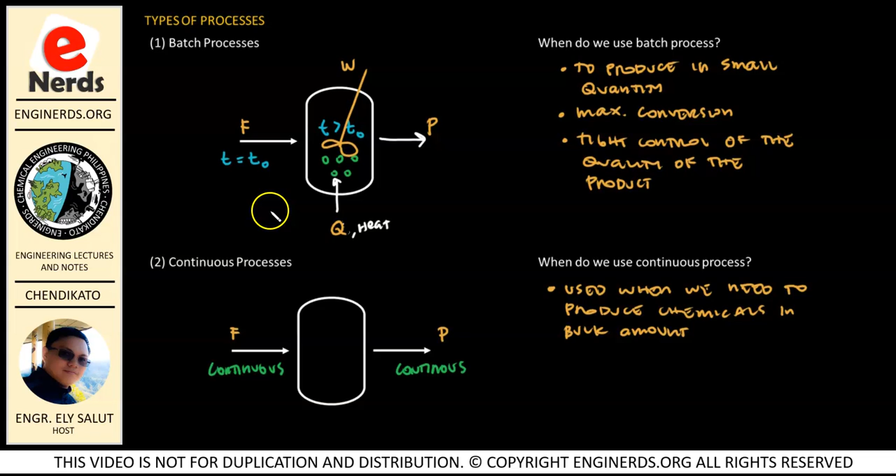So we will be discussing these fundamental laws like the law of conservation of mass, the first law of thermodynamics, and Newton's second law. And then, we will start discussing itong types of processes natin. Meron tayong tinatawag na batch process, continuous processes, and the semi-batch processes.

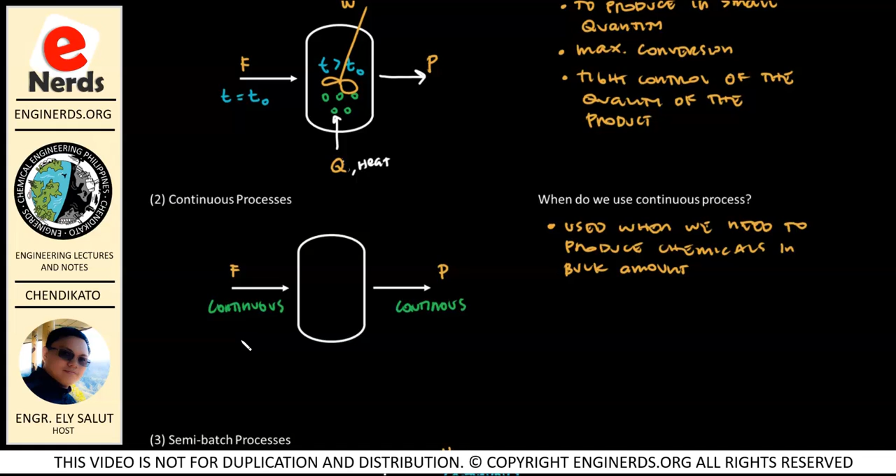Moreover, we're also going to discuss yung tinatawag nating steady state and unsteady state processes. So, mahalaga na maintindihan natin yung pagkakaiba ng mga to bago tayo mag-aral or bago natin sagutan yung mga problems na ma-encounter natin in chemical engineering calculations and unit operations.

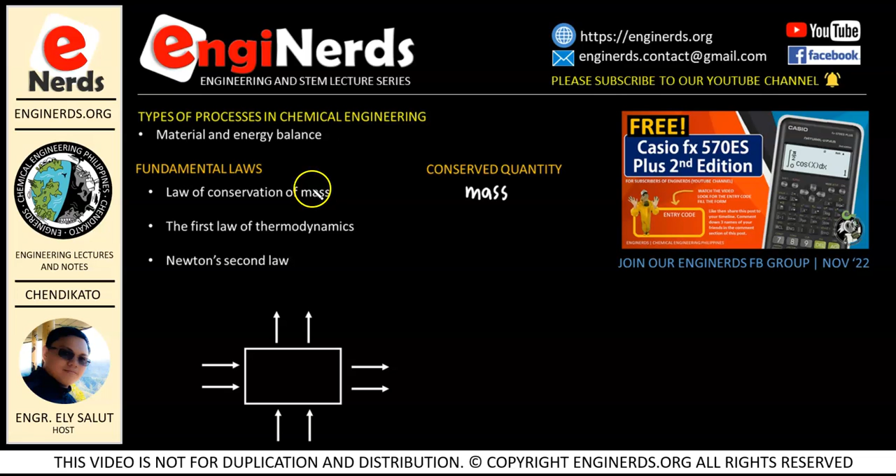Now, another fundamental law na ma-encounter natin is the first law of thermodynamics. The first law of thermodynamics states that the total energy of the universe is constant. So energy cannot be created nor destroyed, but can be transformed from one form to another. We have a separate video about the first law of thermodynamics, kaya if you're really interested about this topic, you can just search our YouTube channel.

So as stated sa first law of thermodynamics, our conserved quantity here is energy. Right, because our energy cannot be created nor destroyed, and it can just be transferred from one form to another.

And another fundamental law na ma-encounter natin when we are studying engineering is yung tinatawag nating Newton's second law. Newton's second law states that the summation of all forces is equal to the rate of change of the momentum. So, therefore, our conserved quantity here is momentum. And you will see the application of this law when you study engineering mechanics.

Well, for our topic today, we will not be concerned a lot about Newton's second law, but we will be concentrating dito sa law of conservation of mass and the first law of thermodynamics, in which our conserved quantities are mass and energy. Because this is usually what we are using when we are dealing with material and energy balance. So, dahil conserved ang ating mass and energy, based dito sa law of conservation of mass and the first law of thermodynamics.

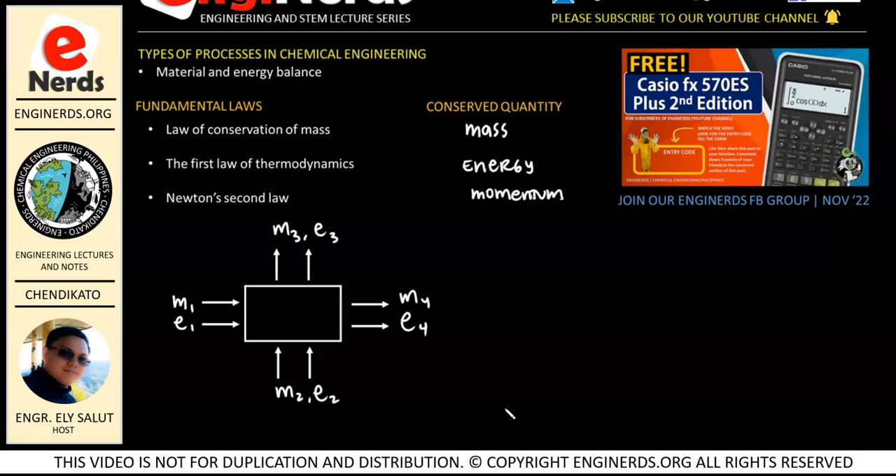Okay, because mass and energy cannot be created or destroyed, but energy can just be transferred from one form to another. Alright, so malinaw na yan, ano? Meron tayong tatlong law na nagiging batayan in studying chemical processes.

So, ano-ano ba yung mga types of processes na ma-encounter natin when we are studying chemical engineering? So, meron tayong tatlong types ng processes. We have the batch process, continuous processes, and the semi-batch processes. So, ano yung mga pinagkaiba niya? Yan yung pag-uusapan natin ngayon.

First, meron tayong tinatawag na batch processes. So, let's consider this as our process. Let's say we have a reactor, and then this is our feed, F. So, ibig sabihin, we are charging our material dito sa ating process. Here in the batch process, we are charging our material at time is equal to 0. So let's say our time here is equal to time 0 or our initial time, right?

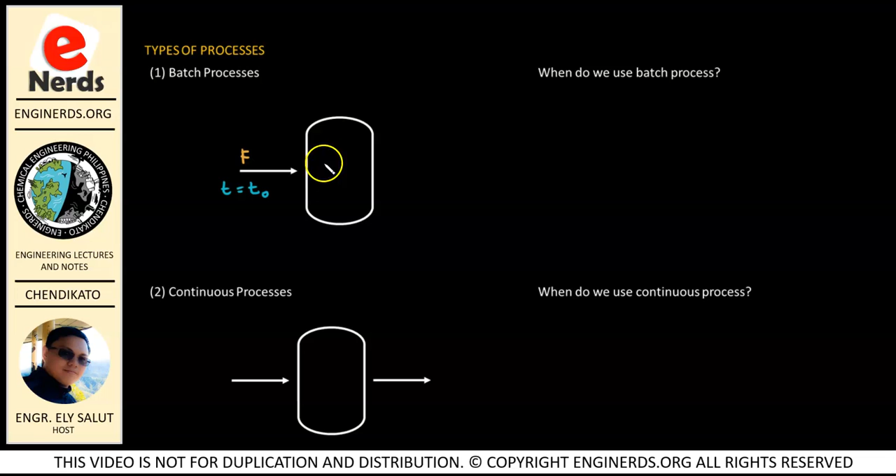One thing that you need to take note kapag meron tayong batch process is that there is no mass that is crossing our boundary. So, ibig sabihin, at time is equal to 0, nag-charge tayo ng feed dito sa ating process. At time greater than time 0, wala nang pumapasok na feed dito sa ating system, because once the process starts, there is no mass that crosses our boundary. Ito yung boundary ng ating process. So wala nang nagko-cross na mass dito sa ating system once time starts for the process.

However, mass lang naman yung hindi pwedeng mag-cross sa boundary. That means, energy can cross our boundary. Ibig sabihin, pwede tayong mag-apply ng heat, Q. So, this is heat. Pwede tayong mag-apply ng energy in a form of heat. Or, if this is mixing, we could also stir our process, so we are also applying energy in a form of work. So, let me change this to orange para mas visible yung ating mga details dito sa ating diagram.

Alright, and now, on the batch process, just after we apply yung kailangan nating heat or work and reach yung kinakailangan nating condition ng ating material, then that's the only time that our product will come out of our process. So this is our product P. Because the product will not come out until our process is finished. So let's say, hinihintay natin mag-take place yung ating reaction or may condition tayo na gustong ma-reach bago natin makuha yung product.

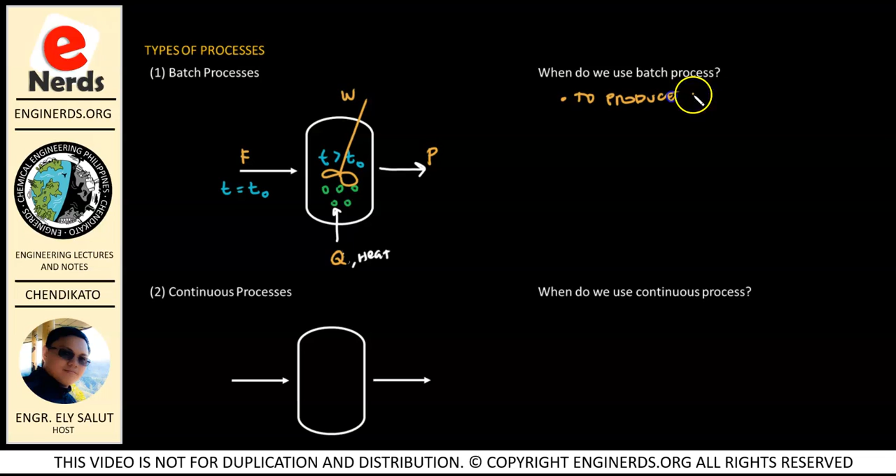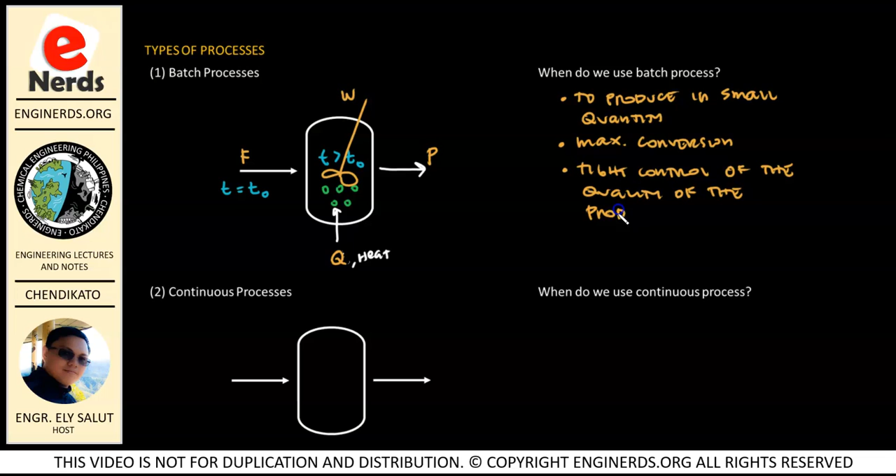So when do we use batch process? Well, we usually use batch process when we want to produce in small quantity. We also use batch process if we want maximum conversion. And also, we use the batch process in order to have a tight control on the quality of the product. Okay, so yan yung tinatawag nating batch processes.

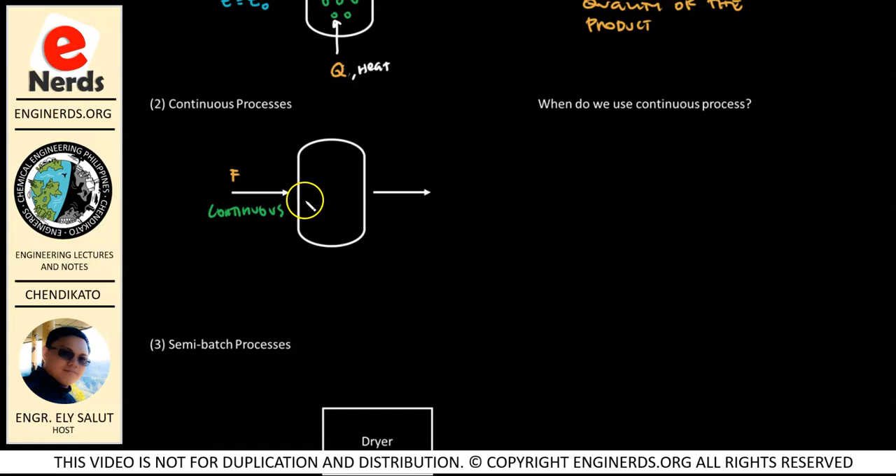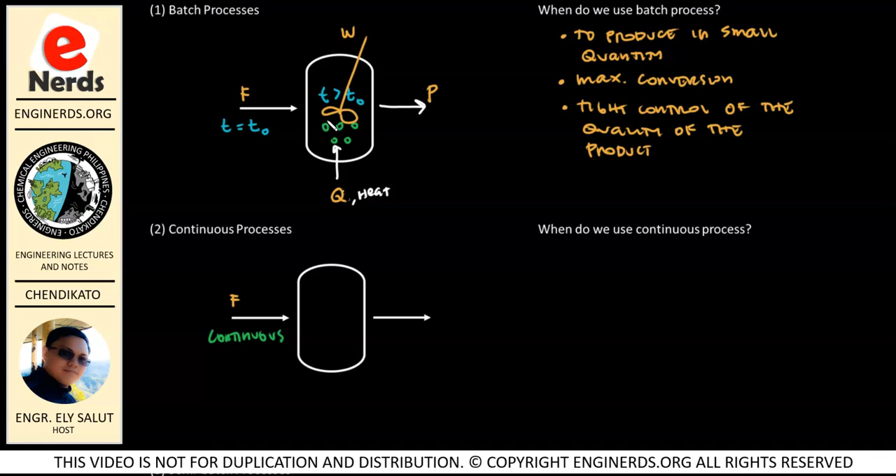So ano naman tong tinatawag nating continuous processes? Ano yung kaibahan niya sa ating batch process? Dito naman sa continuous process, our feed is charged to our system continuously. Kung naalala ninyo sa batch process natin, we will charge our feed dito sa ating system at time is equal to 0. Then after that, hindi na tayo magcha-charge uli. So once the process starts, wala na ring feed na pumapasok sa ating system.

While dito sa continuous process, yung feed natin is continuously fed dito sa ating process. And at the same time, our product P is also continuously taken out. So continuous yung flow ng ating feed and continuous yung flow ng ating product. Okay, so yan yung pagkakaiba niya sa batch process.

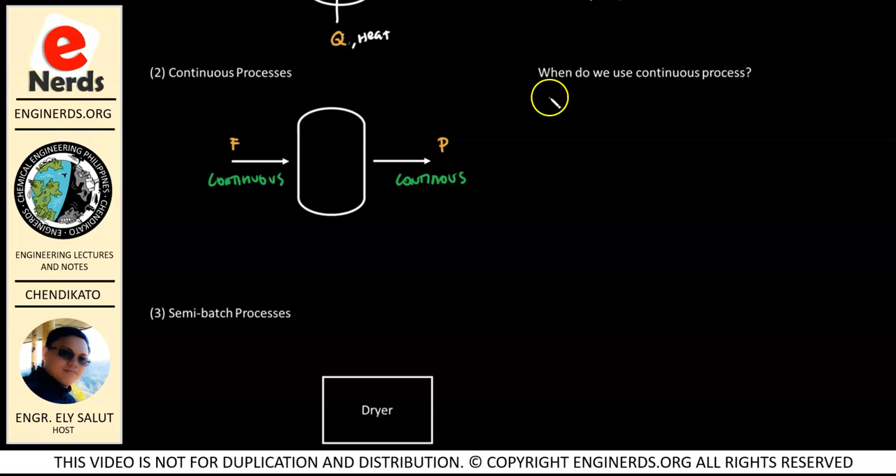We use a continuous process when we need to produce chemicals in bulk amount. Okay, because in continuous process, we will have high throughput. So ang example niyan is yung petroleum refinery, in which we need to produce petrol, diesel, kerosene, and other petrochemical products in a very large amount, and a daily high throughput is required.

Kaya makakakita tayo ng mga large distillation tower in petrochemical industry where yung feed natin is continuously fractionated and the product is taken out continuously. Okay, so yan yung pagkakaiba natin sa ating batch process. In our continuous process, continuous yung feed natin and continuous din yung ating product.

Well, ano naman itong tinatawag nating semi-batch process? Well, semi-batch process is neither batch nor continuous, but rather it is the mixture ng ating batch process and continuous process. And mas madali itong ma-explain if we are going to give an example. So, first, let us have a dryer as our example wherein, let's say, we have a feed or a wet feed in which we need to reduce the water content.

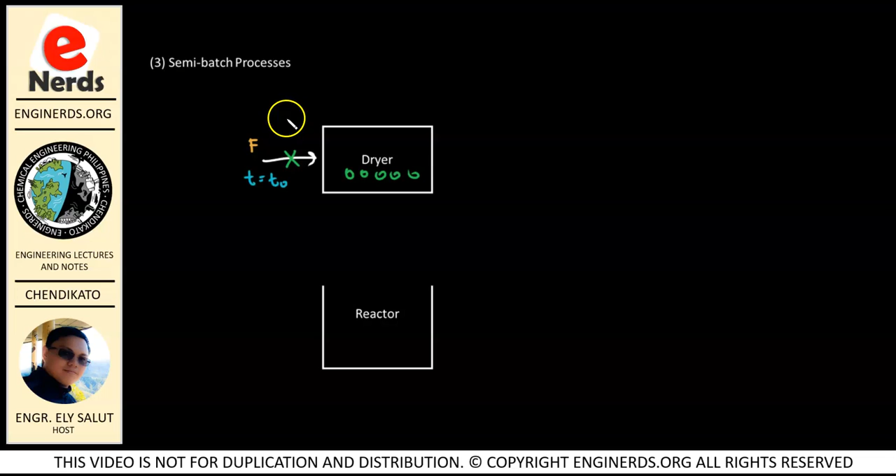So let's say here, this is our feed. Let's have this as F. So katulad nung ating batch process, at time is equal to 0, we're going to feed our raw material dito sa ating dryer. So after that, we will stop supplying itong ating feed, katulad nung batch process. At time greater than 0, wala nang papasok na feed dito sa ating dryer. So kapareho lang siya nung batch process, right?

But then, we will be supplying energy dito sa ating system. Since this is a dryer, we will be supplying energy in a form of heat, heat Q. Now, while we are drying, nag-evaporate yung ating mga water content. So the water is continuously going out of our system. So this is continuous. And then later on, our dry product will be coming out. This is the dried product.

But as you can see, unlike our batch process, wherein the mass cannot cross the boundary, dito sa ating semi-batch process, habang tumatakbo yung ating process, merong mass na natatanggal sa ating system. So, mass can also cross the boundary. Continuously, lumalabas yung ating water. That is why you cannot categorize that as batch and you also cannot categorize that as continuous, because hindi rin naman continuous yung ating feed and product, but continuously merong lumalabas na component dito sa ating process.

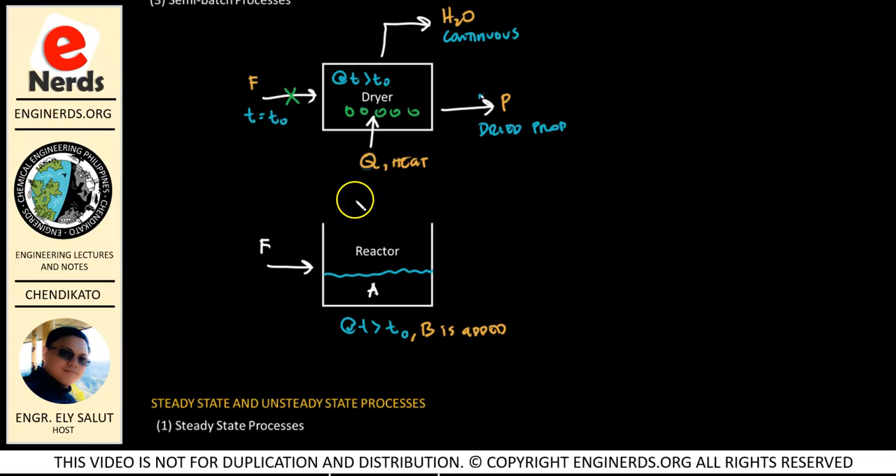So, let's say naman meron tayong reactor. There are also reactors that are used in a semi-batch process. Let's say our feed is charged to our reactor, initially supplied na siya dito. This is our material A. But during this process, at time greater than T0, lumagpas na sa ating initial time, we will be adding component B.

So, we cannot say that this is a batch process because during the process, at time greater than T0, meron pa ring material na nagko-cross ng ating boundary. And because you added another component, you will be mixing that to reach yung kinakailangan nating concentration or condition ng ating product. During that process, our product is not yet taken out of our system, hihintayin natin na ma-reach yung condition na kailangan natin bago natin siya ilabas.

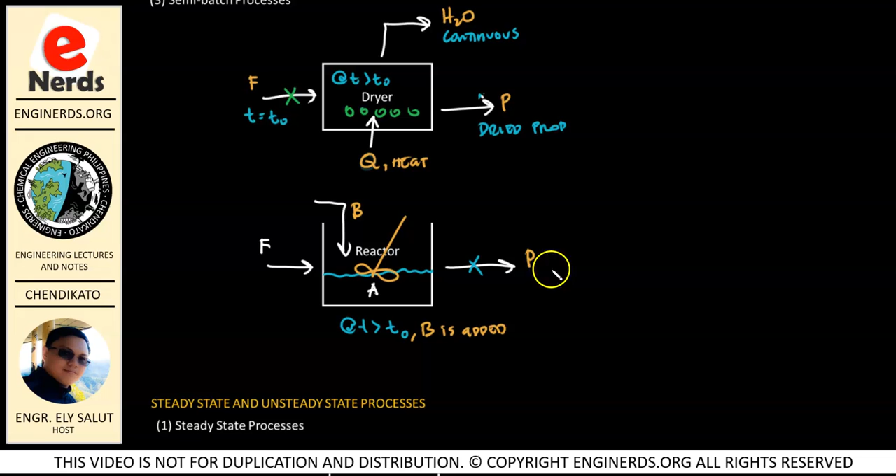So, as you can see, it is not a batch process because here, mass is crossing our boundary at time greater than T0, our initial time. And at the same time, our product is not continuously leaving. So it is not batch, it is not continuous, so this is a semi-batch process.

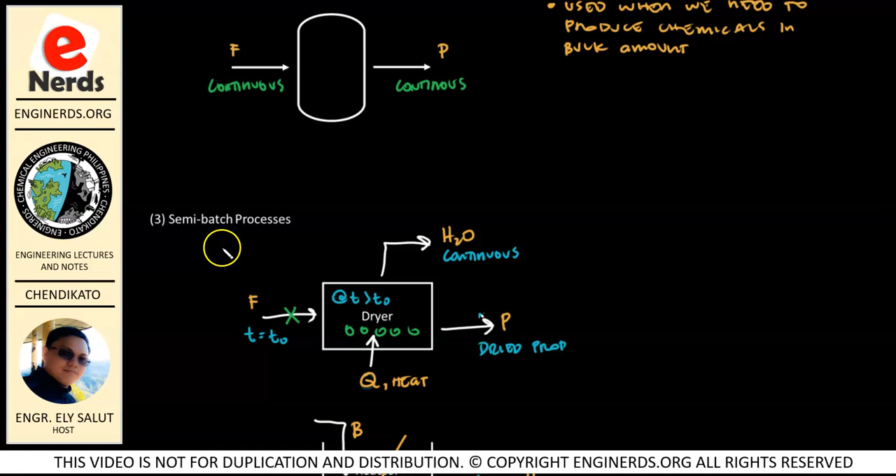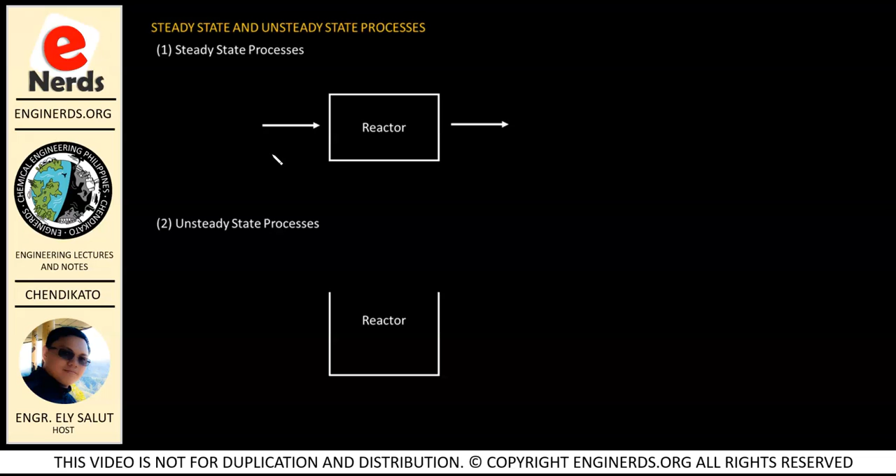I hope it's clear now what the difference is between batch process, continuous process, and semi-batch process. Now, another type of process we encounter is what we call steady state and unsteady state processes. Let's briefly discuss the difference between steady state and unsteady state process.

In a steady state process, our process variables do not change by time. Well, it can fluctuate a little around a constant value, but generally, the variable does not change by time.

Let's say here we have our continuous process, because most of the continuous processes we encounter are operating in a steady state. This is happening mostly in the continuous process we studied earlier. Continuous process means our feed continuously enters our system, and continuously our product leaves our system.

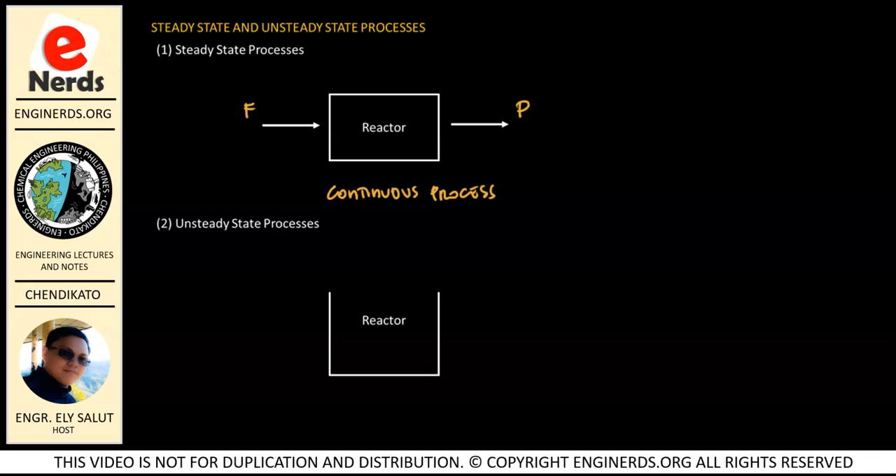Since it's continuous, let's say our feed condition is the same - the concentration of our feed, let's say component X and component Y, is the same entering our reactor. And since we have an expected product with a specific condition, the condition or fractions of our product leaving is also the same.

So in this type of process, our variables do not change, or we only have a small fluctuation. These are our variables like temperature, pressure, our volume, and more. We see this more in continuous process because our variables should stay steady while we are processing it. Since we continuously require our product, the components or conditions should also be controlled.

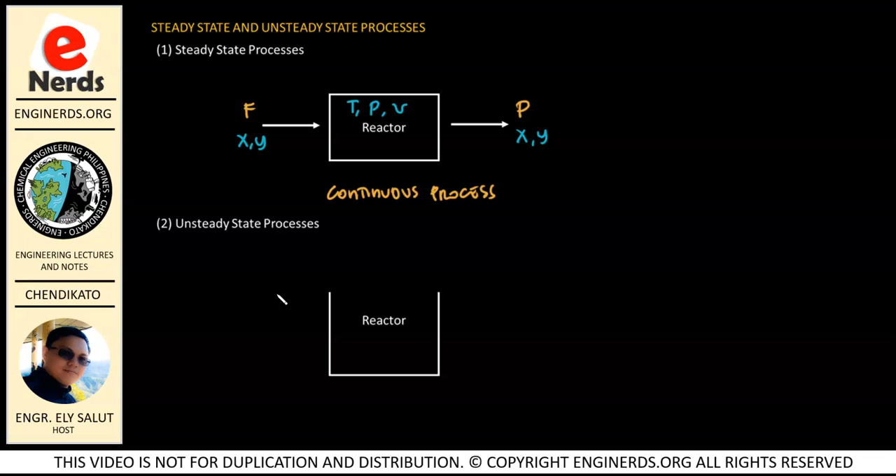Now this unsteady state process is of course the opposite of steady state process. That means variables change with time. When does this usually happen? Our unsteady state process, where our condition changes, happens in batch and semi-batch process.

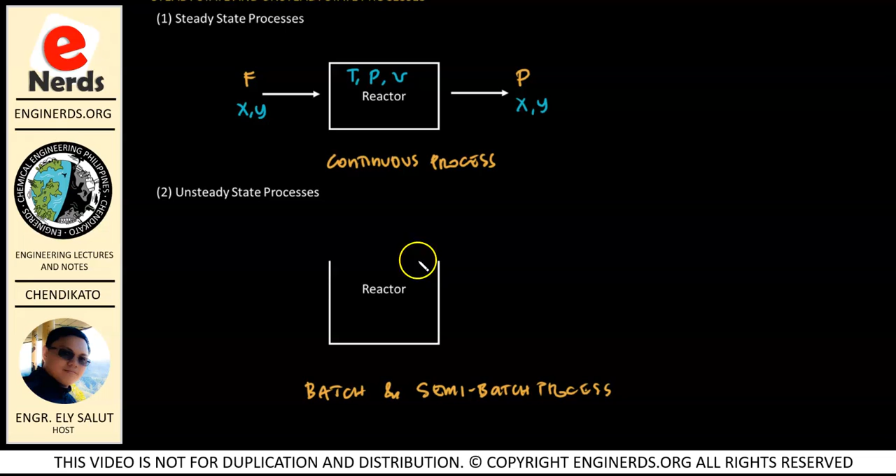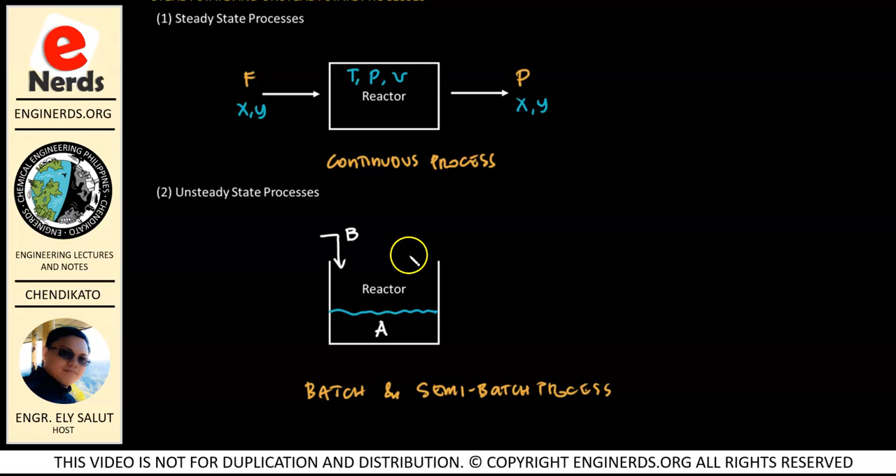So how does that happen? Let's explain. Let's say we have a reactor here, similar to the condition we showed in the semi-batch process. So in our reactor, let's say we have component A here, and then we are adding component B, and then we are mixing, in order to reach the concentration we need.

Now we said in an unsteady state process, our conditions or variables change with time. For example, here we have a reactor - let's give an example. When we are mixing A and B in our reactor, let's say we have an exothermic reaction here. That means energy is being released during the mixing, so our temperature here will increase, for an exothermic reaction.

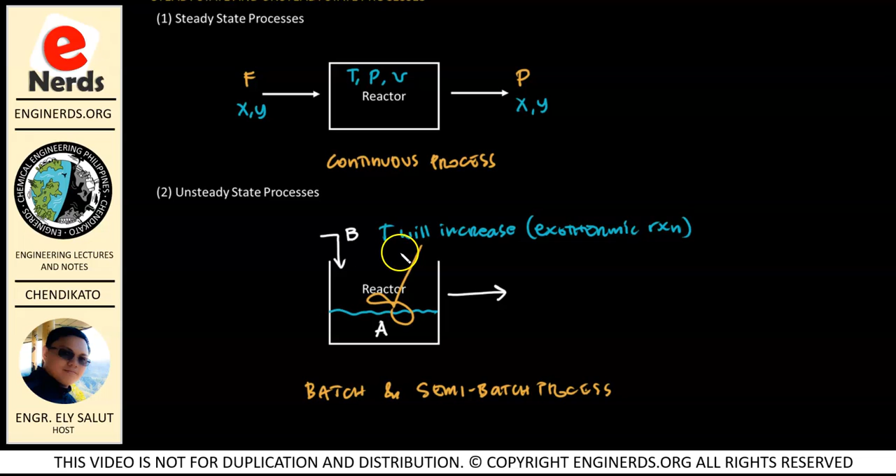That means our variable will be changing with time, because the more we mix and the more B reacts with A, since we have an exothermic reaction, the more our temperature will increase. And once the temperature changes, our pressure, our volume, etc. will also change. So that is what we call an unsteady state process, where our variables change with time.

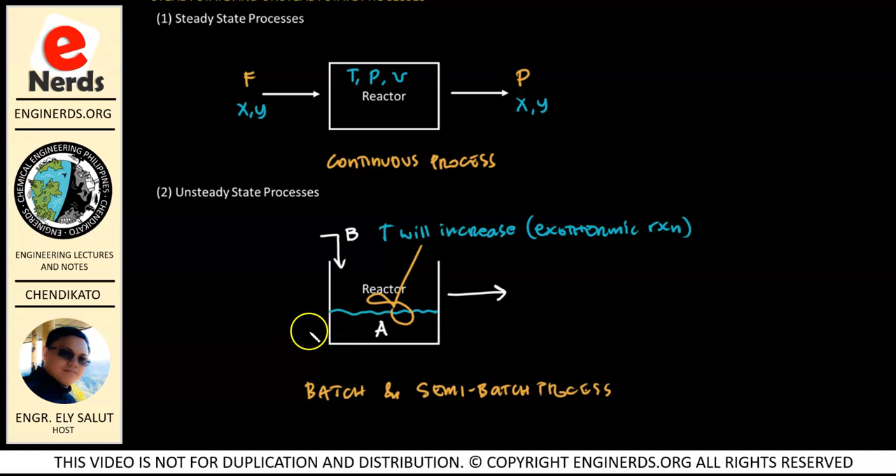I hope it's clear now what the difference is between steady state and unsteady state process, as well as these processes like semi-batch, continuous, and batch process. That is all for now. Thank you very much and have a nice day.